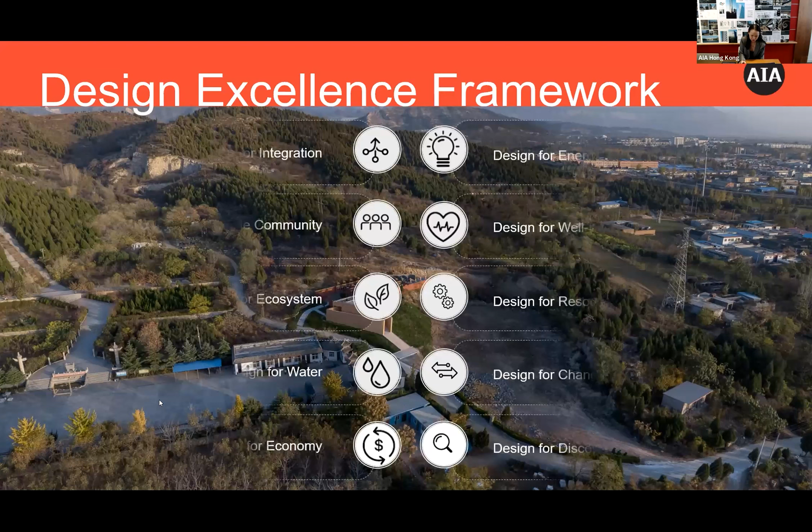And then there's the AIA 2030 commitment. Over 100 architectural and engineering firms of all sizes pledged to address carbon emissions of buildings within this decade. We hold ourselves accountable by reporting the energy and carbon impacts of the projects that we design and build.

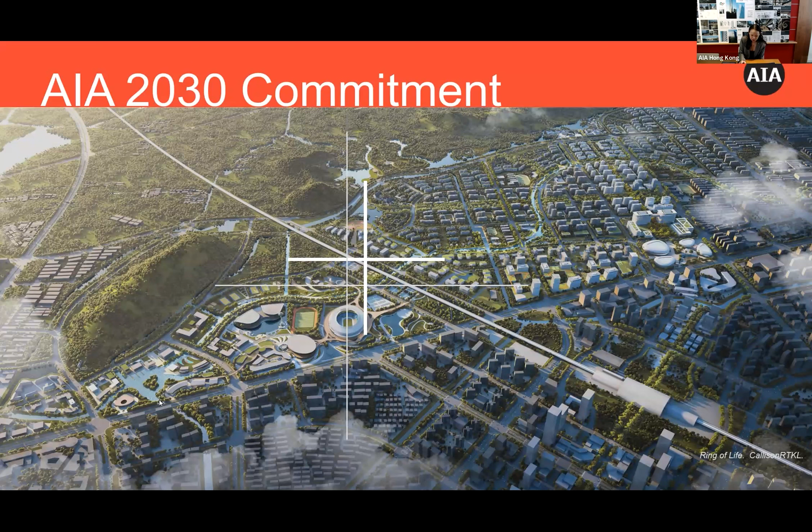By collecting this data, we know where we stand in terms of addressing the carbon emission of our buildings. Over the last 15 years, we as an industry have found ways to reduce operational carbon from building energy use. It is by nature of what we do as architects. So that's operational carbon, but embodied carbon, not so much.

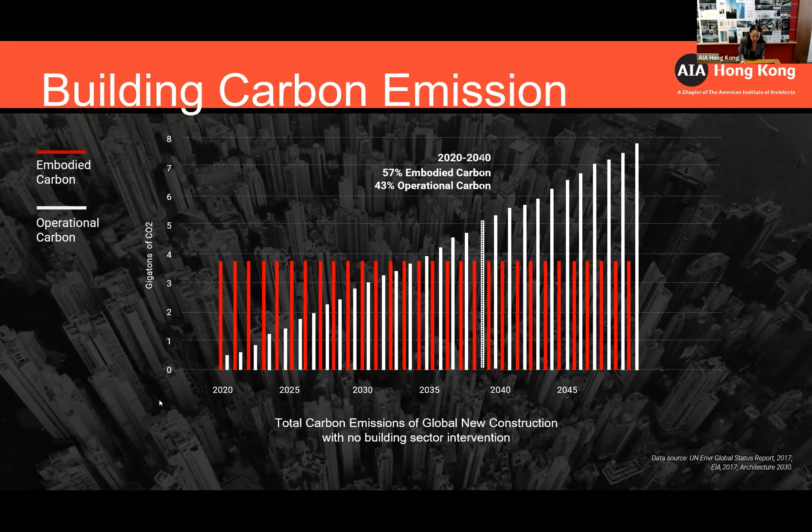Actually, from the firms that we have surveyed, only 5% of the firms have been checking their embodied carbon so far. So we still have a long way to go to address the embodied carbon in our materials. Embodied carbon of material is quite complex because it entails the entire supply chain, and it also goes beyond what we do day to day as an architect.

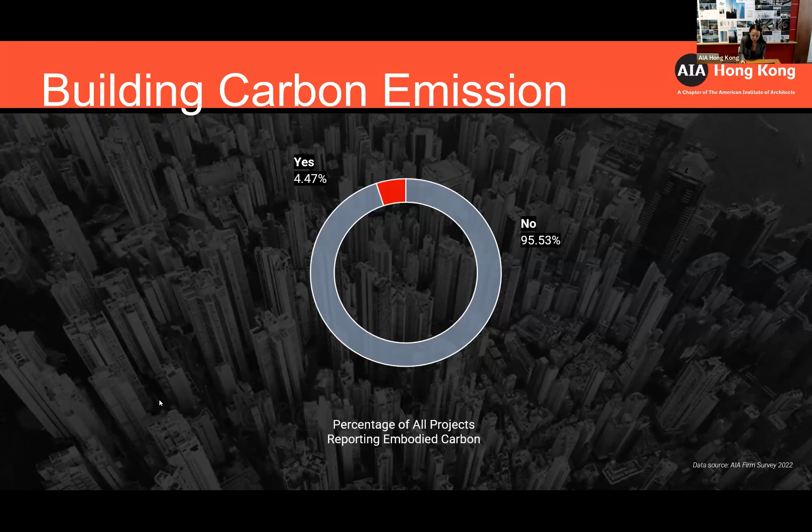But that does not mean we don't have an impact, and that is why at AIA Hong Kong we have been hosting events about embodied carbon of materials. Just last week, we had an event with Color Living, looking at sustainable materials and also looking at hospitality as a sector, and how it addresses the carbon impact in the built environment.

Embodied carbon won't be addressed until we address the supply chain. Last month, we had a visit to the Greater Bay Area, to the Far East Facade Factory, looking at how the organization addresses embodied carbon through the manufacturing stage all the way to installation at the building site. This takes advantage of the Greater Bay Area's unique strength in manufacturing and fabrication of building materials.

We also host a series of green happy hours, like last month as well. We had an event at Quadra where we looked at how the company addresses the entire supply chain, from raw material extraction, manufacturing, to end of life, cradle to cradle, the whole life cycle of the acoustic panels.

As architects and designers, we work project to project. And at AIA, we believe this is our ultimate project. Which brings us to today: we are rediscovering bamboo as a low carbon material. But this is happening in an overarching context of why embodied carbon material is very important.

Hello, everyone. Good afternoon. Thank you, Yimei and Vicky, for the introduction. Thanks for having me at this webinar. The topic of my talk is material diet: strategies to reduce embodied carbon.

So what is material diet? Material diet is about how we could choose the material wisely in order to reduce embodied carbon. It's a bit like the diet we use when we're trying to keep fit. It also talks about a material pyramid, where conventionally we use more high carbon construction material, and now we're starting to use more low carbon material. But there's also choices of climate negative material that we could use.

So if we swap the proportion of material we use to choose more bio-based material, including timber or bamboo-based material, then we could compensate for the higher embodied carbon emission from those conventional construction materials, in order to achieve a climate neutral construction. And that is what the researcher called material diet.

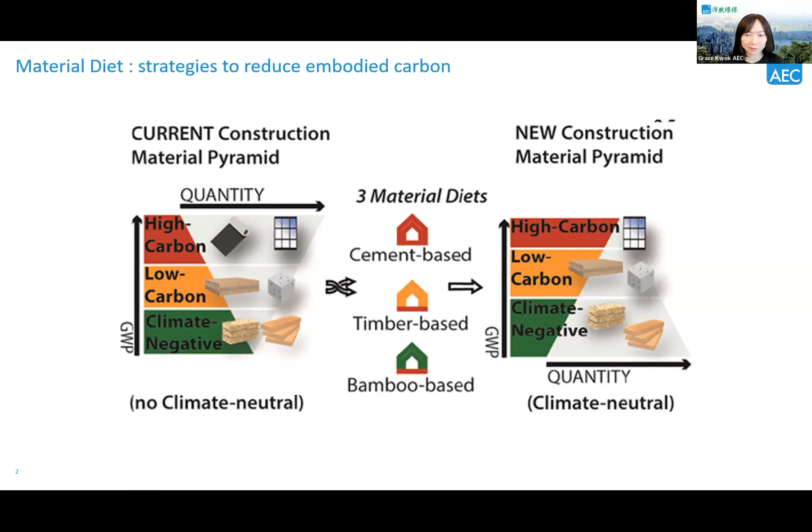So for whole life carbon assessment, I think in one of Vicky's slides she also showed us that in a few years' time, maybe right after 2030, the amount of embodied carbon in the whole life cycle impact of a building will be more than that of operational carbon. That is because operational carbon is going to be largely reduced because of the use of new energy, more renewable energy, and decarbonization of electricity consumption. So in a lot of countries, they're looking at zero carbon electricity generation after 2030. So it is important for us to focus on ways to reduce the embodied carbon.

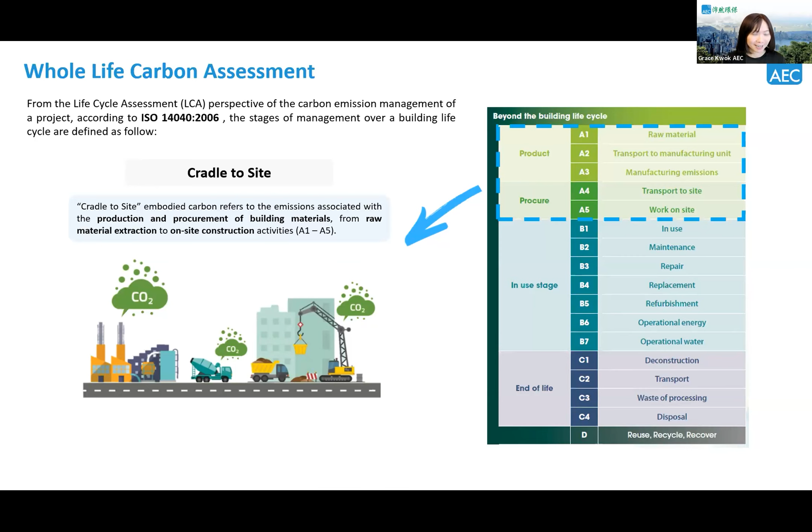So what is whole life carbon assessment? From a life cycle assessment perspective, it is about managing the carbon emission from different stages over a building's life cycle. In the table on the right-hand side, you could see in the building's life cycle, we look at product, procure, in-use stage, and end of life. During the construction stage it's more about the product and procurement stage, so the carbon emission from raw material to transport to manufacturing unit and manufacturing emission. In fact we call it cradle to gate. If we include transport to site and work on site, that will be cradle to site, so from A1 to A5 on this LCA assessment.

From A1 we're looking at all kinds of material used in a construction project, including rebar, concrete, metal, wood, etc. A2 is about transport to manufacturing units, so it's the carbon emission from the transport of raw materials to the production plant. Then the manufacturing process carbon emission is covered in A3.

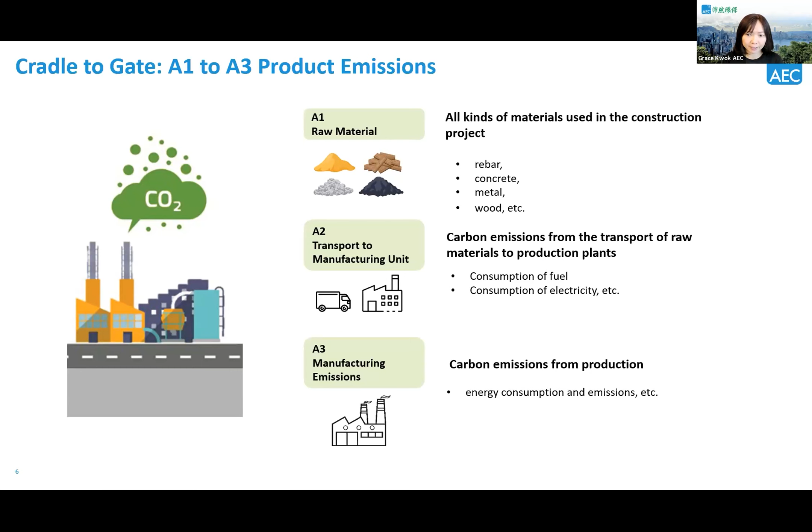After the construction materials have been manufactured, we need to transport them to site, and the carbon emission from that part is covered in A4. So to reduce embodied carbon emission, we encourage the use of materials produced regionally, and locally is even more preferred, to reduce the environmental impact arising from transportation. So how do we define regional material? It's a material that is extracted, harvested, recovered, as well as manufactured within 800 kilometers from the project site.

So A5 is about work on site. It covers fuel consumption, fresh water consumption, purchased electricity, and also waste disposal of the waste that could be generated on site.

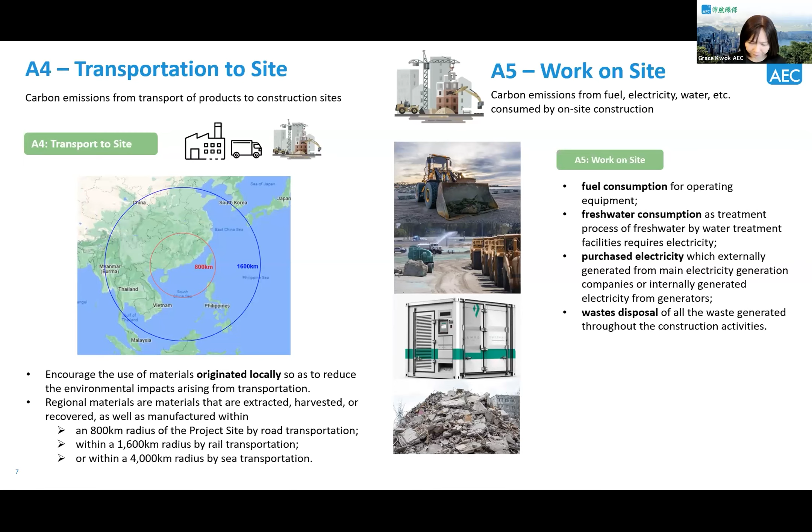So what about greenhouse gas emission accounting for the real estate sector that's used in finance sectors and also in ESG reporting? For GHG accounting method, we are using scope 1, 2, or 3 greenhouse gas accounting methods. Scope 1 is the direct emission of carbon, which includes the fuel you're going to use in your facilities or your vehicles.

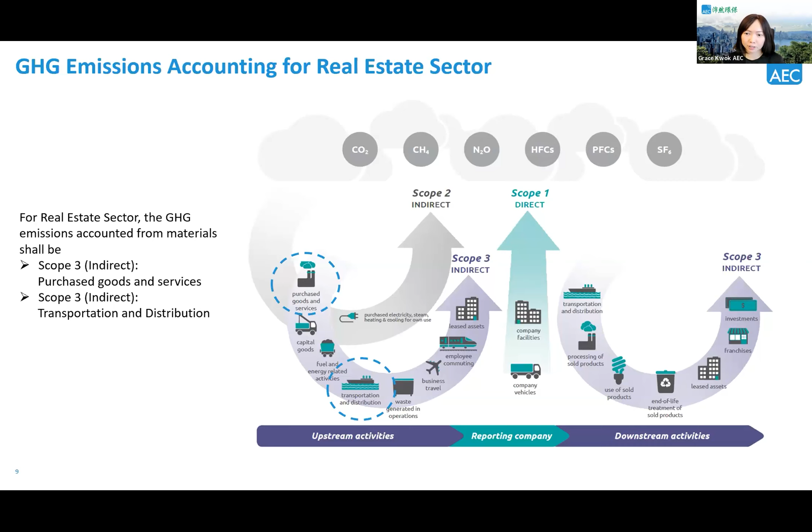Scope 2 is the indirect GHG emission, mainly purchased electricity, while scope 3 would include the indirect emission from upstream and downstream that covers purchased goods, capital goods, transportation, business travel, and the end-of-life treatment of sold product. So if we're looking at construction material and construction activity, that would be the upstream scope 3 emission from purchased goods and services from the contractor, and also the upstream transportation and distribution to the construction site.

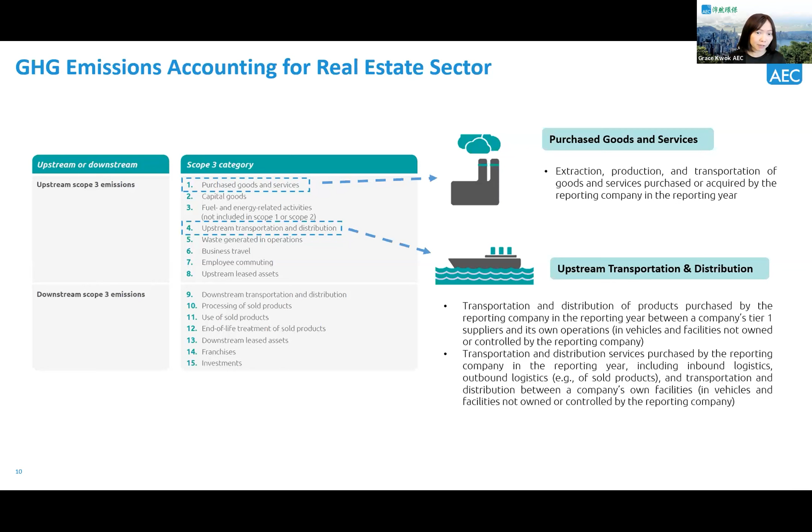In fact, if we include the waste disposal and the construction activity from demolition at the end of life of the building, that would also cover the end of life treatment of sold products from scope 3 downstream.

So what about the latest trend in the green building industry and ESG landscape related to embodied carbon? I think the most important one is the establishment of a global baseline and different reduction pathways for embodied carbon emissions. So RIBA has set a baseline according to this table for different types of building, and also a midterm target of 30% reduction in embodied carbon by 2025 and 40% reduction by 2030. It covers school, office, and domestic.

And also LETI in London, they have set out a target for 40% reduction of embodied carbon by 2020, and 65% reduction by 2030, with some baseline that they've set from data collected in the UK and some European countries.

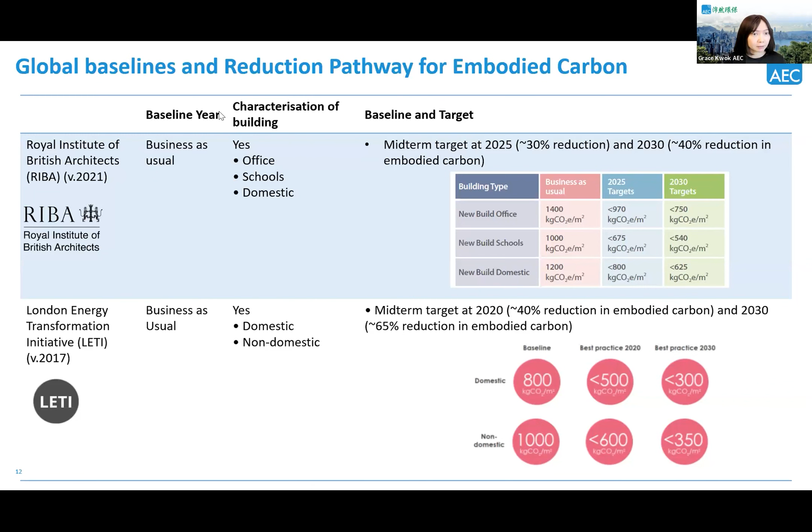Another global baseline recently published is by the Science Based Targets Initiative. Now, a lot of companies have set out their own ambitions and decarbonization targets, and some of them have used the Science-Based Target Initiative to set out targets aligned with the Paris Agreement.

So this is a new set of guidance for the building sector published by the Science-Based Target Initiative in mid-May, which is now under consultation. If you're interested, please check out this guidance and tools on SBTi's website, and you could provide your feedback during this consultation period. I think it will end mid-July.

Yeah, 16th of July. So one of the key proposals in the Science-Based Target Initiative building sector guidance is about the embodied emission pathway. They also have another proposal for the operational carbon reduction pathway, according to the CRREM pathway. You can check that out as well.

So back to embodied carbon emission pathway, which is the topic of today. They have set out some global baselines as shown in the table on the right-hand side for different types of building: residential, office, retail, and other types. But you could see the target is considered quite stringent if we are using some of the embodied carbon baselines in Asian countries.

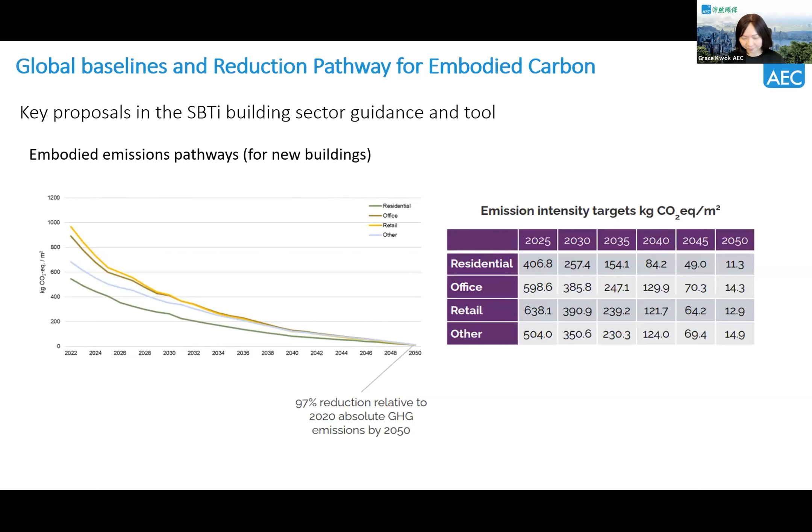This is because for this global pathway and target, they have used data collected probably more from European countries. So in the embodied emission pathway for new buildings, the reduction target is in fact quite ambitious: 97% reduction relative to a 2020 absolute greenhouse gas emission by 2050 for embodied emissions.

So what about Hong Kong? In fact, the Hong Kong Green Building Council has just published a climate change framework for the built environment earlier this month. Within this framework, there's a chapter about operational carbon target setting and embodied carbon target setting, and also a chapter on physical climate risk assessment, and another one about climate resilience and adaptation.

So you're also encouraged to check this out. This publication can be found on the HKGBC website as well.

So for embodied carbon, there's a proposed certification scheme under this climate change framework to encourage industry stakeholders to set targets. First is to reach 40% reduction by 2030, which is also aligned with the World Green Building Council vision. Then the target is to have zero upfront embodied carbon by 2050.

So there are two approaches. The first is a self-determined embodied carbon baseline for a project, where you could use two or three design options to compare with it, and a consistent approach should be used for determining the baseline case and the alternative design case.

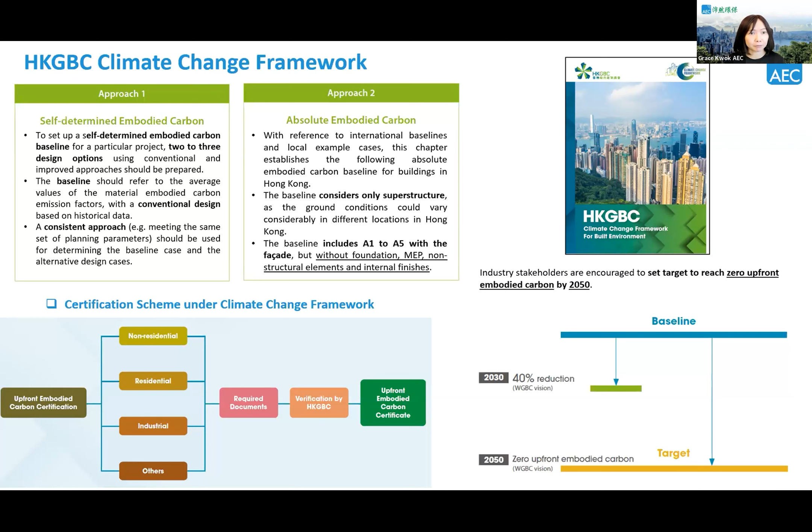So to increase comparability of different building designs, the baseline includes A1 to A5, that is the construction phase upfront embodied carbon, which I introduced earlier. So it does not yet include foundation, MEP, and non-structural elements including internal finishes, but this is a living document. So we're going to see a further version possibly including more elements and components of the building in the embodied carbon emission calculation later on.

And then during the design stage, we should consider build less and build clever, to optimize the build form and structure, to use DFMA, and also design lighter facade, etc. Reduce the MEP ductwork. Design for flexibility and deconstruction is also important, so that we could reuse some of the material and reduce demolition later on during the building life cycle.

Build clever to optimize material usage and design with low carbon materials, recycle materials, and also build efficiently to use low carbon construction technology and eliminate waste. So pre-construction and prefabrication is also a method that we're using more to build efficiently.

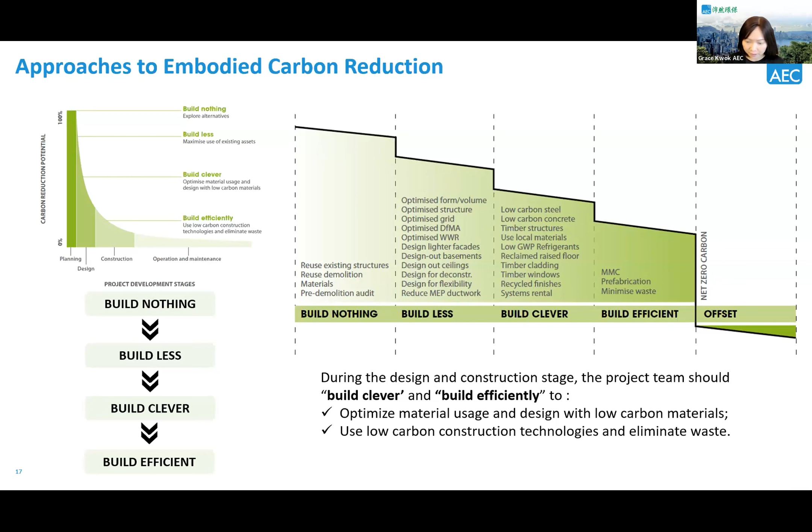So now when we're choosing the material, when we're designing for different build form, the embodied carbon consideration should be taken early, because later on it's difficult to reduce it further. So this should be the first thing you consider when you're designing and choosing the material. The cement and steel, in fact, represent the highest portion of embodied carbon in buildings, especially in Hong Kong.

And the cement sector is also the third largest industry energy consumer, and second largest GHG emitter from the industry. So it represents 5 to 8% of carbon emission globally. I'm going to talk a bit more about green concrete and green cement later on in the case study.

And steel, now we are using more recycled steel because it's highly reusable. So it is recycled under the circular economy model. Steel products such as rebar are produced from electric arc furnace with scrap steel, and in fact can achieve more than 90% recycled content. So the global warming potential value of rebar is much lower than those produced from blast furnace.

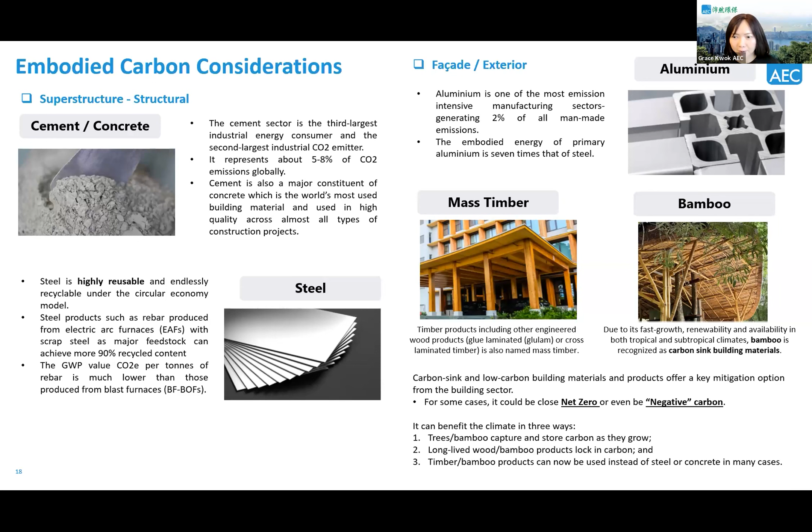So another very important trend is to specify material with requirement on environmental product declaration. Environmental product declaration is actually a standardized document. It will tell you about the product's environmental and human health impact. It is based on an ISO standard, the ISO 14025 standard, and it is a scientific footprint method using the life cycle assessment.

So first, you need to conduct a life cycle assessment before you can have all the data to be included in the EPD. It will tell you about the product's environmental impacts so that you could choose the different product carefully.

And this is an example of an EPD. So you can see in the EPD there will be the system diagram of how the product is produced, and the module that is covered in this EPD. You could see for this particular product, this is a solid wall precast concrete.

It covered the product stage from raw material supply to transport, manufacturing, and also the transport to the construction site, and also end of life usage, including deconstruction, transport to the waste processing and disposal, as well as reuse and recovery potential of this material.

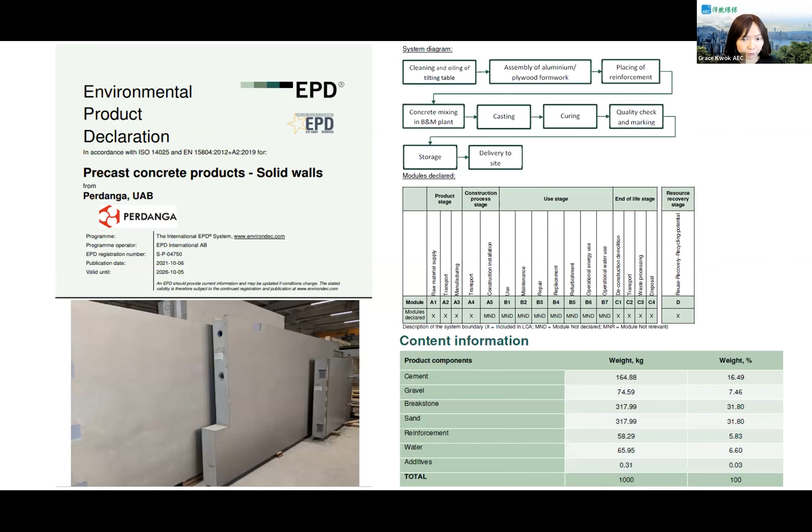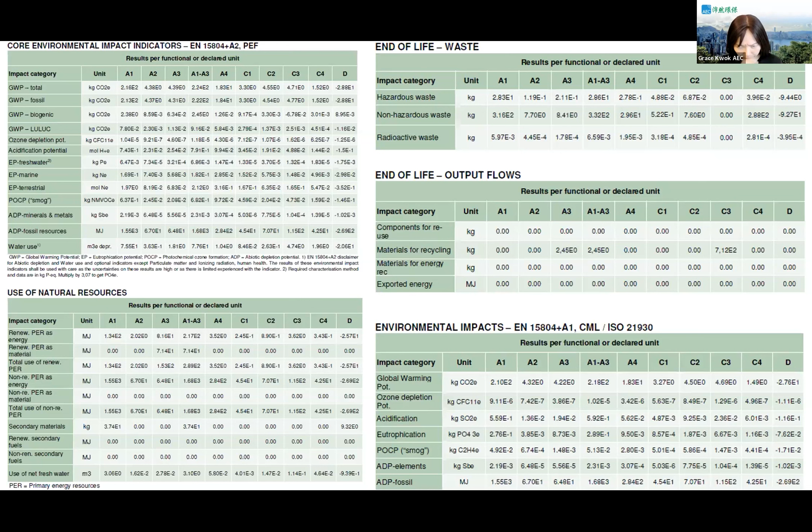You have the content of the material and also different indicators showing the environmental impact of this material. So I would like to highlight, on the right-hand side, the bottom table. Usually in the EPD, we'll use the global warming potential to show the carbon footprint of the material.

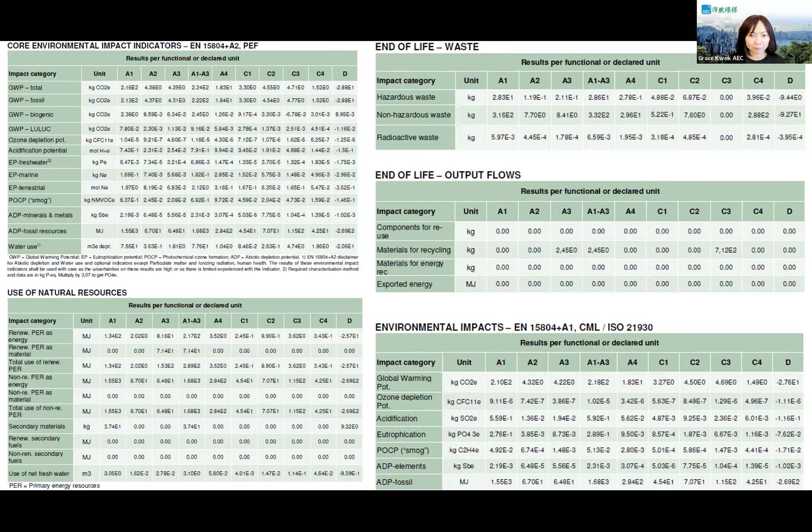And it's also important to note that, for material having an EPD, it doesn't mean that it would be low in embodied carbon emission. You need to check out those values and compare among different products to choose one that can meet your requirement for embodied carbon limit.

And there's also different tools available for you to estimate the building life cycle carbon emission. In Hong Kong, we have the CIC carbon assessment tool, but there's also international embodied carbon assessment tools available.

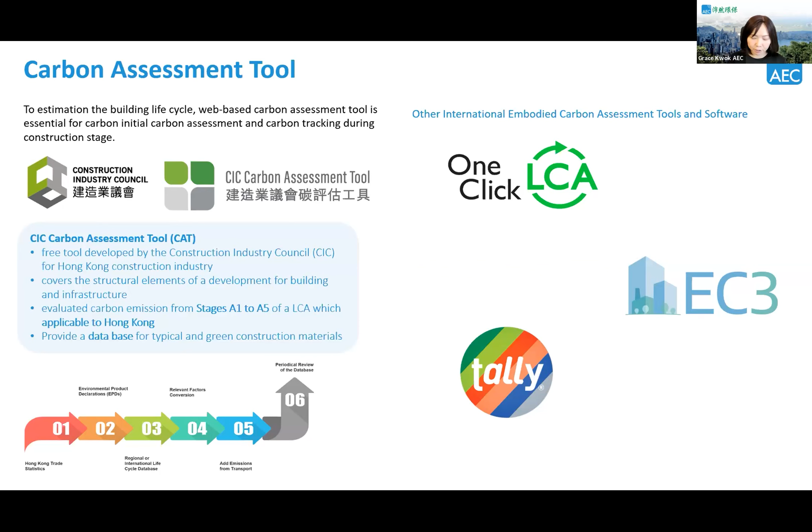It is important to note which modules the tools cover, whether they include all the stages or just some. For example, the CIC carbon assessment tool includes stages A1 to A5, but it may not cover some fit-out material. Other tools may cover more materials related to interior design and fit-out.

Another important move is to conduct construction stage carbon management as part of the life cycle assessment. Before, when we focused more on operational carbon, we would conduct building energy simulation to find the operational carbon emission of a building under different design scenarios. But now we also need to find out the embodied carbon emission from different building designs and choice of materials.

So we would conduct preliminary embodied carbon assessment based on the preliminary design, and develop a carbon management plan, such as setting different KPIs for target embodied carbon, and developing construction materials specification with recommended emission factors for building materials. Embodied carbon tracking during construction is also important, to review the emission factors of the construction materials used, keep track of emissions, and propose actions or measures if necessary.

And the final embodied carbon assessment verifies the embodied carbon at the end of the construction stage, reviewing the actual embodied carbon emission against the target. This is important for us to learn from each project, gather the data, and have better construction stage carbon management in the next one.

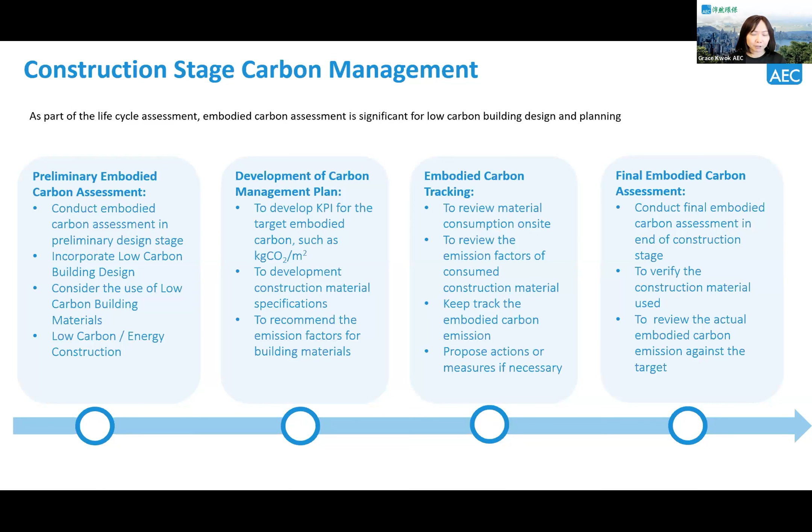So this is a case study on construction stage carbon management. This project is still ongoing, in Hong Kong. It is a redevelopment project of a Grade A office on the Hong Kong Island side. We have proposed low carbon features like low carbon EAF, green rebar steel, green concrete and cement mixed with cement substitute, biodiesel use on site, construction site electrification, and comprehensive site practices for waste management.

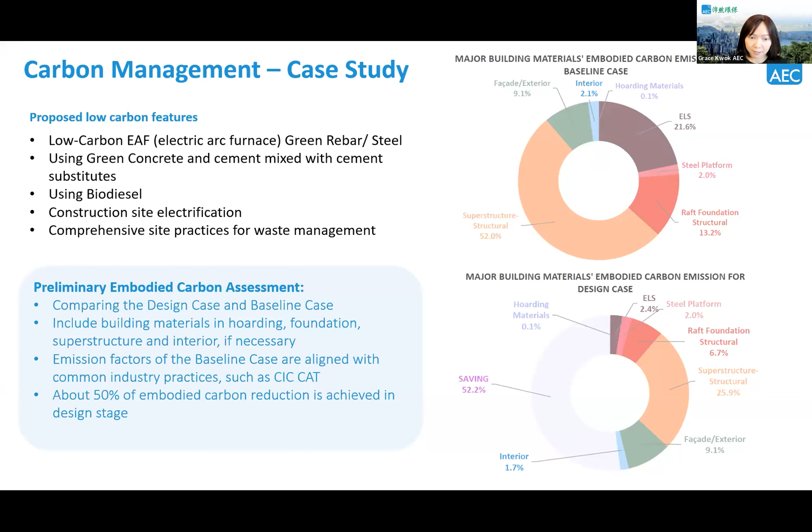For green rebar and steel, this is now the largest driver in achieving low carbon emission, using high recycled content and switching to electric arc furnace. Compared to typical rebar, the carbon footprint can be reduced by 40 to 50%. In this case, we are also using regionally manufactured green rebar.

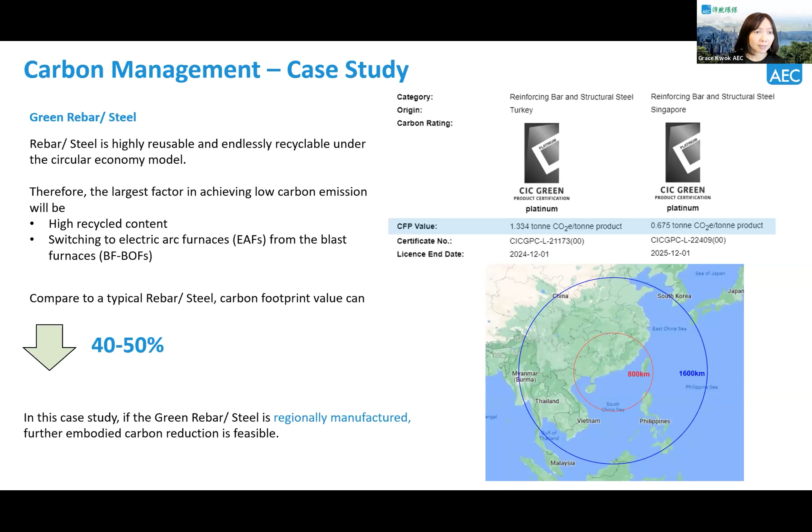For green concrete, we're using PFA up to 25 to 35% cement replacement, and GGBS and silica fume, in order to reduce embodied carbon from the concrete. The low carbon cement is regionally sourced, from a cement manufacturer with a clear net zero strategy and roadmap.

Other low carbon construction practices include using biodiesel, early planning and contact with the utility company so we could use electricity on site as soon as possible when construction starts, good waste sorting and recycling practice to increase waste recycling, and carbon tracking and reporting to review the actual embodied carbon emission.

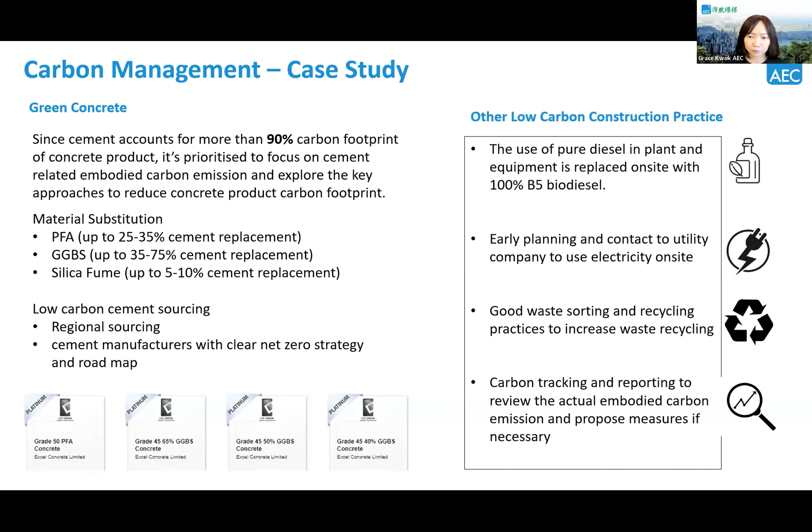Lastly, a bit about AEC Group. Our company is Hong Kong-based, a pioneering sustainability and environmental consulting firm with more than 29 years of experience. We have 5 segments: green and healthy building, environmental consultancy and sustainable design, acoustic, audiovisual, lighting and theater design, and green finance, sustainability and ESG advisory, as well as smart and green IoT.

We are now working with clients on both project and organization level to achieve carbon neutrality and enhance climate resilience. If you're interested, you could check out our website. There's also a film about green building that we made before together with BBC and World Green Building Council. Thank you very much.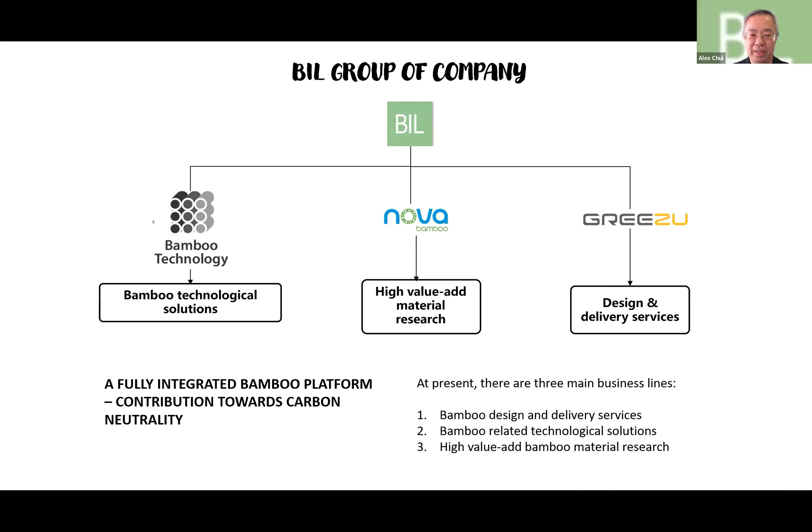A brief introduction about us, Bamboo International Limited, BIL. We have different business lines in addition to the more traditional design and delivery services of building material. We also have other business lines through joint ventures with different entities, because we believe that to promote bamboo, we really need to spend resources and time on research to dig out all the hidden benefits of bamboo as a material. We also try to integrate bamboo with other green technology to form more integrated green solutions to offer to the market. So that's where we are.

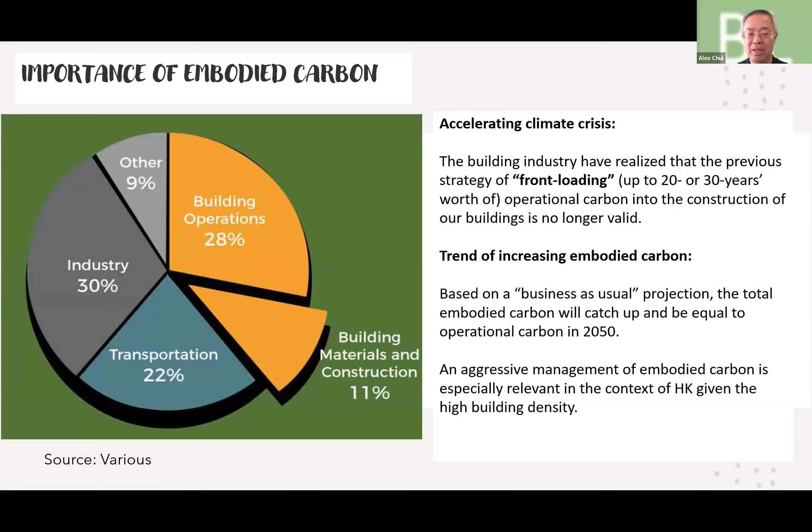In Europe, the European Parliament has passed two key initiatives at the beginning of this year. It sets out clear initiatives and clear targets for member states to follow. They try to set out more definitive targets to be achieved in terms of embodied carbon, and they also want to unify the methodology to be applied in the EU. I think that would go a long way to encourage the building sector to put more emphasis on tackling embodied carbon.

We also believe that would drive industry to have more innovation to explore new low carbon materials, not just bamboo, but other low carbon materials to be used in the market.

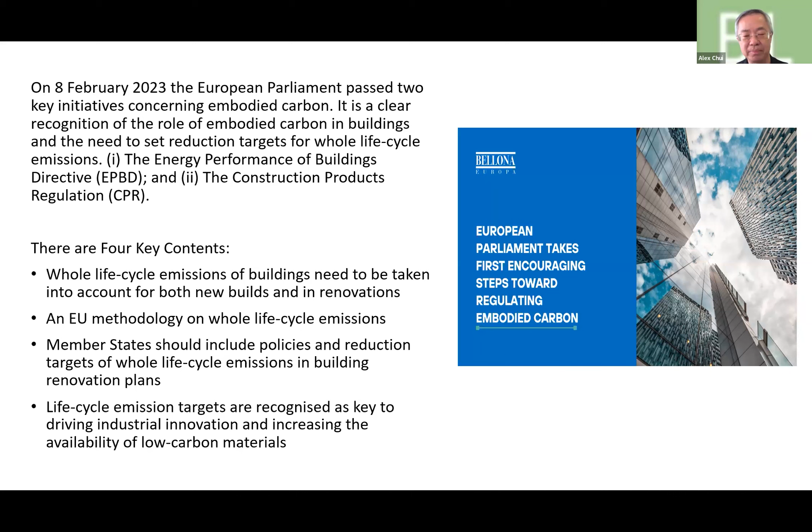China actually is moving faster. Back in 2022, they passed two policies to encourage the procurement and application of low embodied carbon building materials in the country. In the same year, and I think the year before, in consideration of low embodied carbon building material, China has earmarked bamboo as one of the key building materials they want to pursue.

I think the reasons are, one, China has rich resources in bamboo, and second, as I mentioned earlier, bamboo industry is a very important poverty relief initiative for the Chinese government to take care of farmers in the country. So they are really moving ahead in promoting bamboo in the market, and hopefully Hong Kong can follow quickly along this line of direction.

Now, the benefits of bamboo. I think we all know that bamboo as a natural material is a renewable resource, and is beneficial to the environment, including soil health, and of course the carbon sink property. I'm not going to go into detail of all the small numbers, but I think we are all aware of this environmental benefit in natural bamboo.

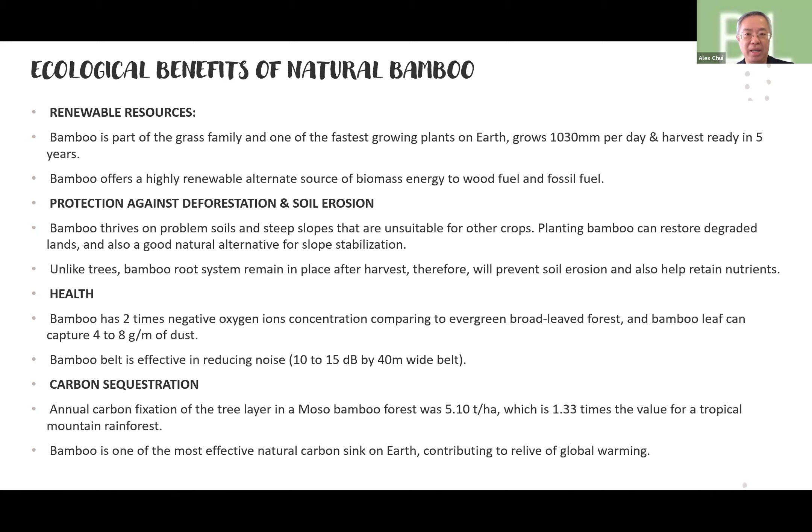I would now turn to engineering bamboo, which is normally what we use in the building sector. Generally, there are two types of engineering bamboo. One is what we call solid bamboo, basically a laminated product hot pressed using glue. The other is what we call strand woven bamboo, formed by high pressure pressing of bamboo strips in a more fibrous form.

They have different pros and cons and different applications. Solid bamboo is generally more versatile and flexible, and can be turned into various profiles for a big range of design aspirations, which I will show later in the slides.

Strand woven bamboo is a later technology. The key reason for strand woven bamboo is it is much more hard and robust, and more suitable for environments with heavy traffic, especially flooring in outdoor and high traffic environments, say in a train station. Looking at the table below, you can see a high level comparison between the physical properties of engineering bamboo and timber. You can notice that engineering bamboo in terms of physical properties is at least matching, if not better, than timber that we normally use in the building industry.

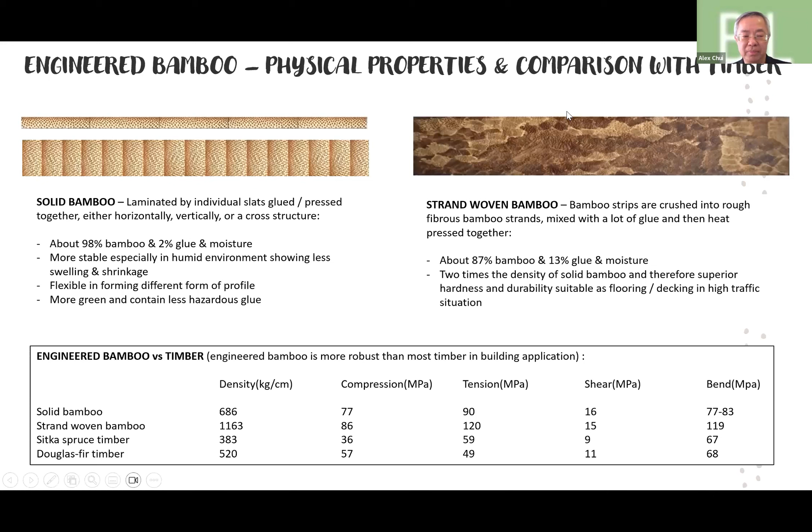These slides are following some examples about the application of engineering bamboo by our company. In Hong Kong, it's mostly used as a finishing material.

The top left-hand side is the Shaw Auditorium in HKUST. Below is the M+ Museum. In the middle is the Kowloon East Regional Police Headquarters. And on the right-hand side is the Hang Seng University in Sha Tin.

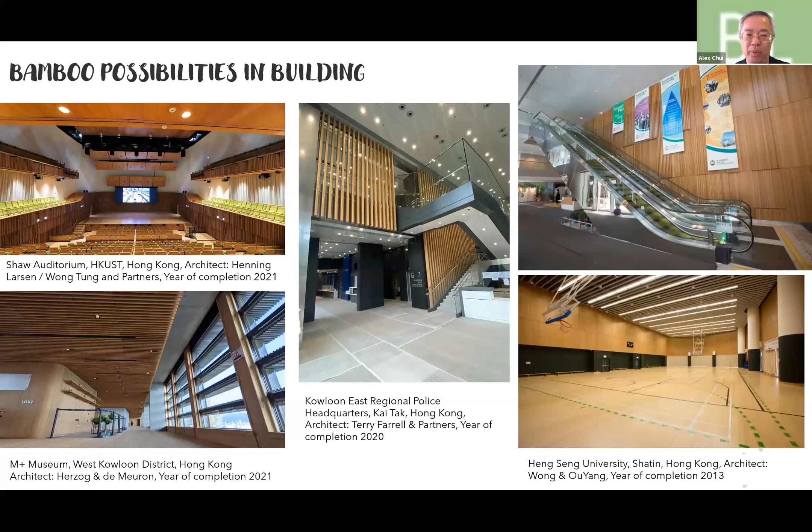The next slide is about some structural bamboo projects that we undertook in China. It is true that internationally, including China, there isn't any regulatory framework on structural bamboo. Only recently has ISO passed new regulations.

ISO has released new regulation to look at structural bamboo. But the Chinese government is more open to embrace a more engineering approach to use structural bamboo in different settings.

Here are the projects that we have been doing in China. We're seeing a lot of mass timber structural buildings in the US and Europe, and based on our experience, structural bamboo can actually achieve very similar results.

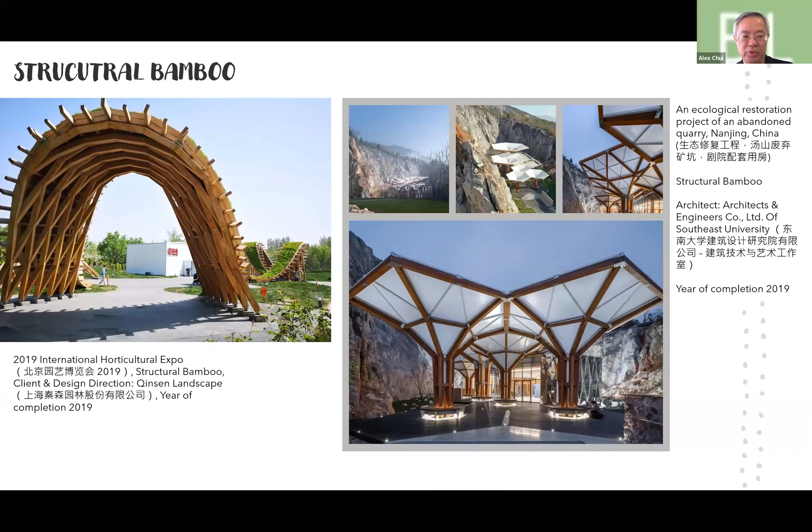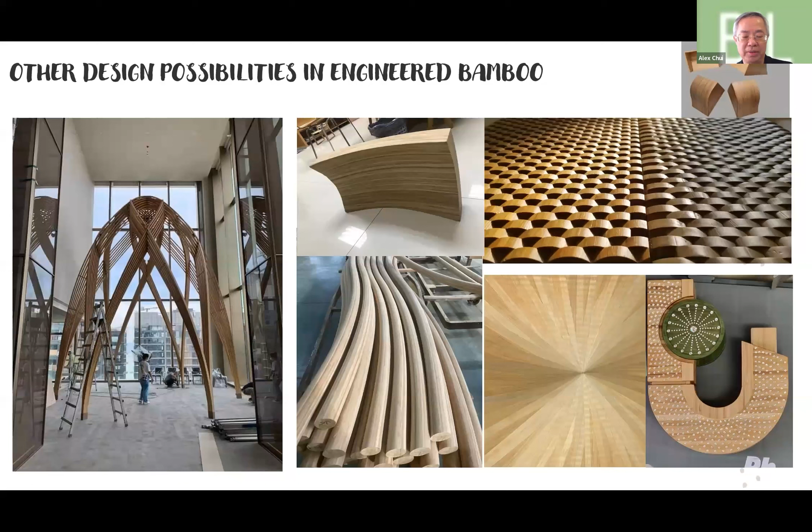Bamboo furniture is actually becoming very popular in the US and Europe, not so much in Hong Kong, but overseas it's becoming a very promising market.

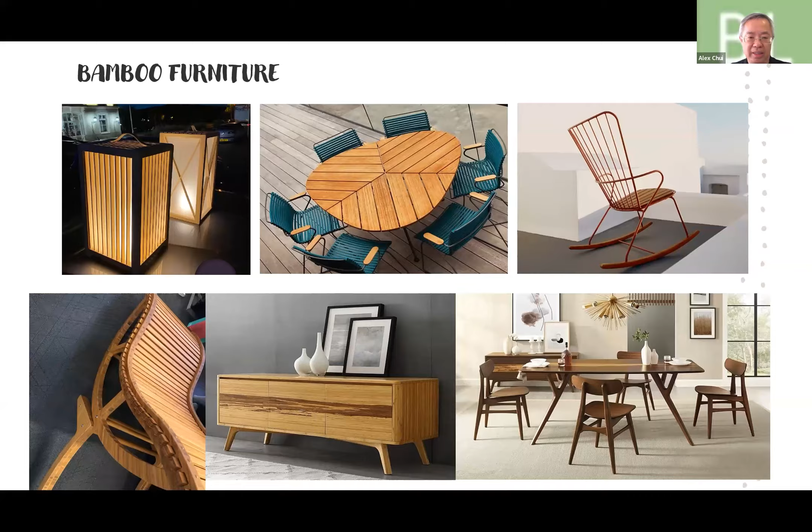Durability is a question that most people will ask about engineering bamboo. This is a project that we did about 10 years ago in Shanghai - it's a restaurant where the building facade is made of bamboo panels.

Now it's 10 years on. I took these pictures earlier this year. There hasn't been any really aggressive maintenance or replacement in the 10 years.

You can see that the bamboo panels are still in a very decent condition, which sheds some light on the question about the durability of engineering bamboo in external environments.

Shanghai is actually quite wet and humid, similar to Hong Kong, so that should give us more confidence when we consider bamboo as a facade material.

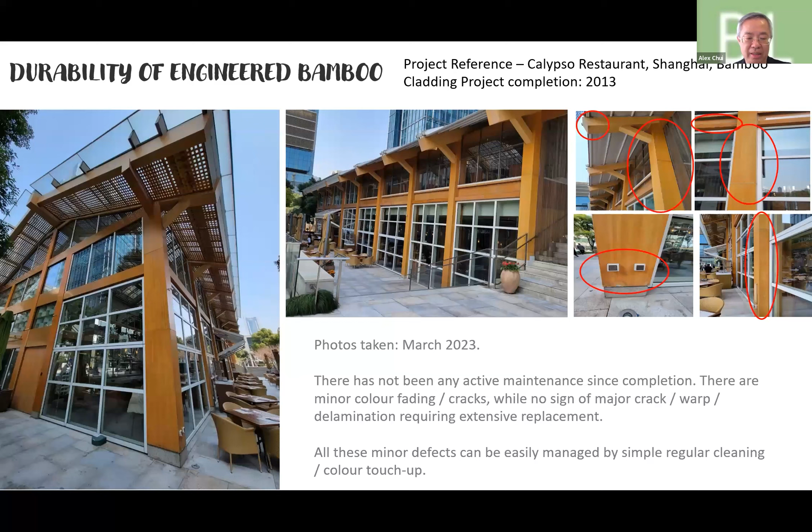This is in Hong Kong, the Hang Seng University - the deck was also completed 10 years ago. Because the deck is more frequently used, more regular maintenance is required.

But I think the key issue here is, yes, there is color fading as a result of radiation, but we are not seeing any substantial structural defects or damage in the past 10 years.

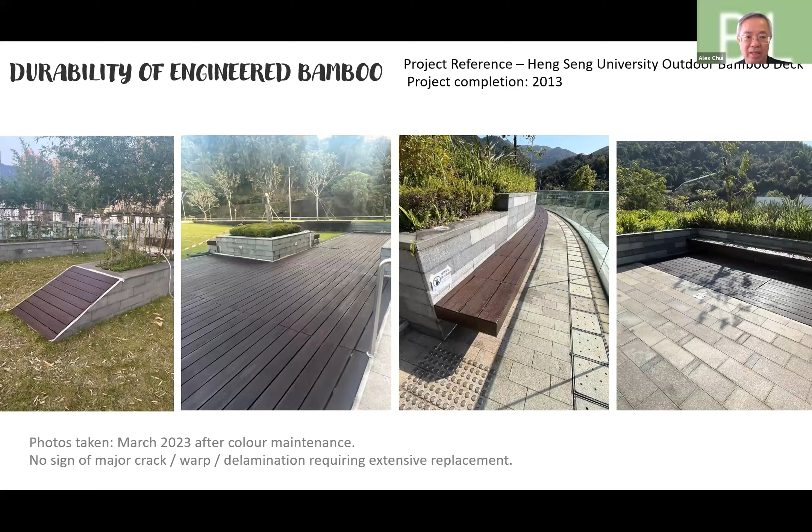This is a research paper by one of the researchers in Europe. They're talking about a material diet - Grace has covered that, but this is a paper I think is worth reading.

It sets out a very comprehensive analysis on the life cycle assessment of different materials - cement-based, timber-based, and bamboo-based - looking at the potential benefits of the different materials in the pursuit of carbon neutral buildings.

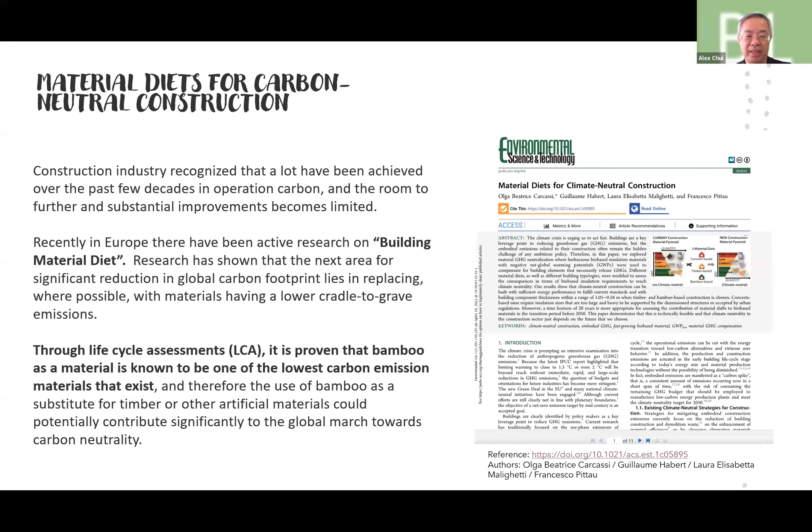This is a study that we commissioned a professor at the City University to help prepare for us. We are using the actual manufacturing process of our own factory to carry out a life cycle assessment.

We compare that to other more commonly used building materials available in the market. When we look at the left-hand side, the green, orange, and red figures are based on different end-of-life treatments of the bamboo.

In Hong Kong, we really don't have any real end-of-life treatment of any bio-based material - basically it ends up in the landfill.

But even given that, you can see that the embodied carbon of bamboo - this is based on cradle to gate, the factory gate, not including transportation from the factory to the final site destination.

You can see that the embodied carbon is basically very close to neutral. And if you take into account active end-of-life treatment of the bio-based materials, say we use it as a bio-based fuel in place of fossil fuel for energy generation.

The combined embodied carbon actually becomes negative because of the carbon saving, the carbon credit gained from consuming the bamboo at the end of life as bio-based fuel material.

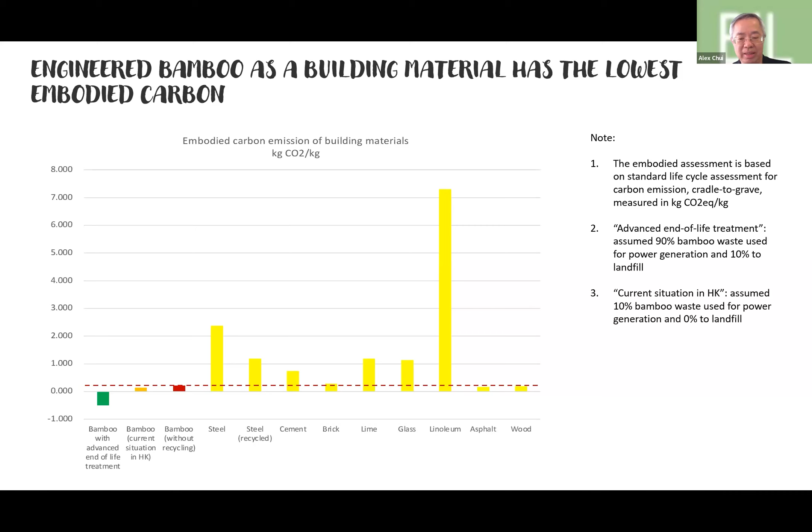So it is a very encouraging sign, and we tried to capture the numbers in a more quantitative manner. Now, looking into the future, what can we do more to promote bamboo, in our opinion?

Despite bamboo being used quite extensively in the US and Europe, and its robust physical properties as engineered bamboo being well tested and documented, it is still not one of the mainstream materials that stakeholders in Hong Kong want to consider, including the government, private developers, and facility managers. Architect friends have been helping to promote bamboo in many occasions, but at the end, the final developer and facility manager are actually quite conservative, and we are seeing a lot of roadblocks along this direction. But hopefully that will change.

The mindset will change going forward. One of the things that we believe could actually help promote bamboo is the regulatory framework. There isn't any regulatory framework, there isn't any requirement on the assessment of embodied carbon in Hong Kong, and that is one of the key barriers in the onward promotion of bamboo in Hong Kong.

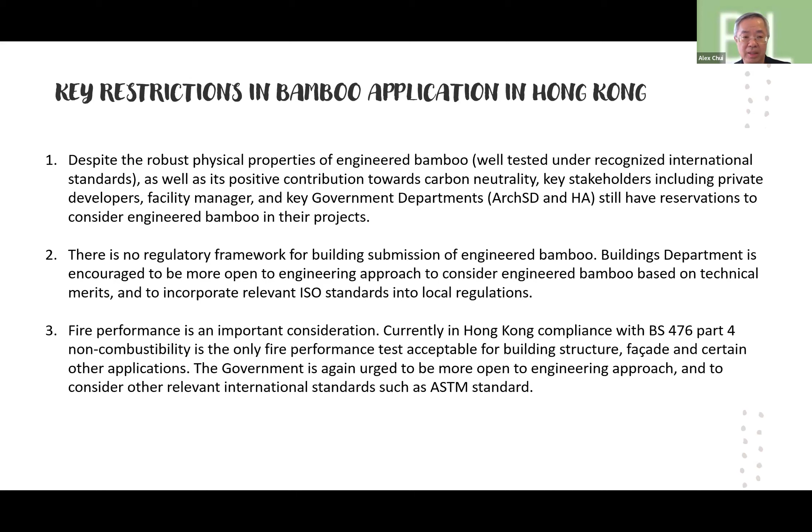Hopefully the situation will change. There are a few things I would suggest going forward in the promotion of low embodied carbon material. As mentioned earlier by Grace, the Hong Kong Green Building Council is passing a new framework on embodied carbon, and hopefully the government will also respond to include embodied carbon in the Hong Kong Climate Action Plan 2050. It's quite disappointing that this is not even mentioned in the Hong Kong Climate Action Plan 2050. Hopefully the government will revisit this and borrow the experience from Europe and from China to really gather the resources in Hong Kong to tackle this issue.

This is the same report I mentioned earlier that we commissioned a City University professor to carry out for us. We were trying to quantify the potential benefit if engineered bamboo is used more extensively in Hong Kong. This is a very interesting scenario: we try to replace the wood stock in Hong Kong with engineered bamboo and look at the carbon saving as a result. You can see two numbers here.

One is the business as usual case, meaning there isn't really end of life treatment of the bamboo, but you can still see a very significant improvement in embodied carbon. If Hong Kong also has end of life treatment as in other parts of the world, the embodied carbon mitigation benefit can actually be very substantial, up to almost 25% of the total carbon emission in Hong Kong in the year 2020.

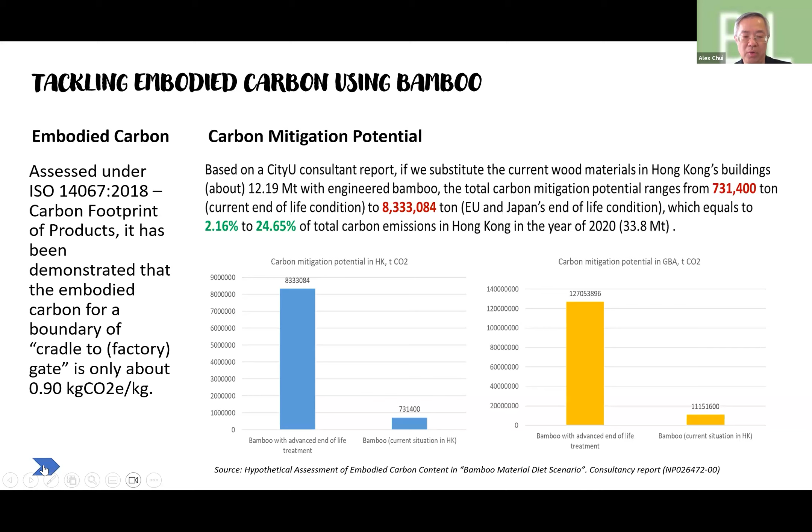I believe this is a very good tangible presentation of the real benefit of low embodied carbon material, including bamboo. The other point, as I mentioned earlier, is that we would like more government support in research and development in bio-based low embodied carbon material. We have been working with City University on material research, and this is our first research product.

We call it Super Bamboo, and it received a Gold Award at a Geneva conference on innovation. We have US and Hong Kong patents already. This Super Bamboo actually has two benefits in this material.

We structure the bamboo material in a way that we do not need glue to form the final product. As I mentioned earlier, from raw bamboo to engineered bamboo, glue has to be used to make sure the structure is there to form what we need for the eventual end building products. But in this particular invention, we discovered a way to rearrange the bamboo material so that we do not need glue to form the final product. So that is, if you like, the greenest building material that we can look for.

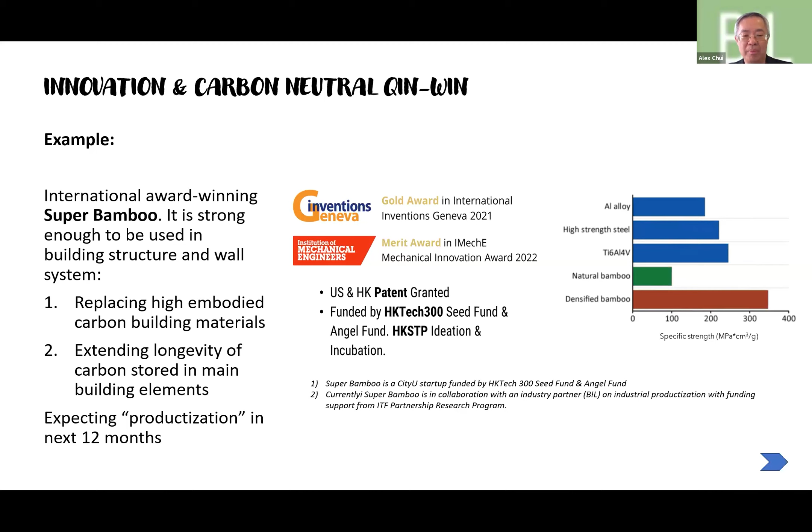That's why I always want to emphasize that it's a scenario of innovation and carbon neutrality being win-win. There's always room to take out more value in bamboo and other bio-based materials to make them a more ready alternative to all the conventional building materials.

I'm not sure you're all aware, bamboo is basically part of the grass family. That means first, there's no regulatory barrier against planting bamboo in Hong Kong. Second, it grows very quickly, one of the fastest growing plants. And it has a very robust root system, meaning it can tackle poor soil conditions, and even be used as a soil retaining measure.

When we look at Hong Kong, despite what we always talk about the high density, actually the percentage of built area in Hong Kong is quite low. There's a very extensive area where we can encourage the planting of more natural bamboo. This will definitely help improve air quality in our city, and hopefully restore some of the degraded land in the New Territories.

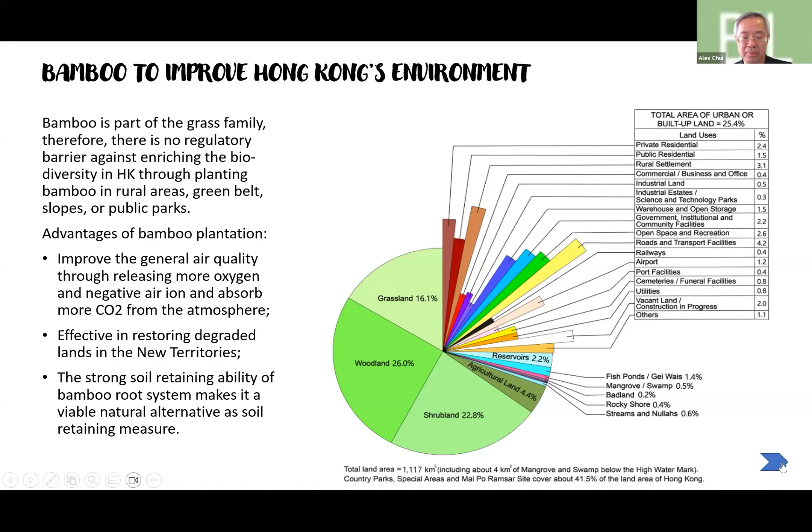As a member of the Federation of Hong Kong Industries, we are asking for a meeting with the Environmental Bureau sometime later this year. One topic on the agenda is to discuss setting up a public-private collaboration task force, to learn from the experience and regulations from other parts of the world, and revisit some of the regulations and rules in Hong Kong to encourage or allow the use of more bio-based material in this city. Hopefully we can get going.

We really want to embrace a more open attitude, looking at this purely from technical merit, to see how we could encourage more bio-based material to be used here, which I'm sure will help reduce embodied carbon in Hong Kong as a whole.

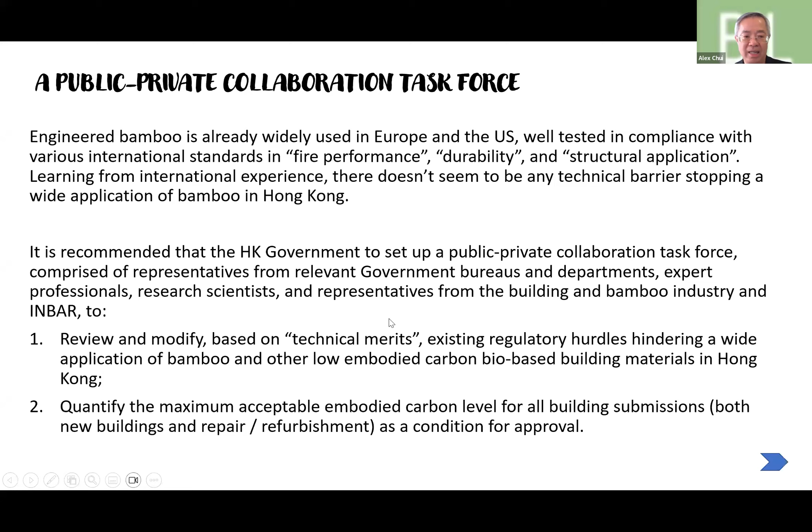Lastly, there's an initiative we and our partners have been looking at in the past 12 months. China has been moving very quickly in encouraging bamboo industries in the country. We're looking at it from another perspective: given Hong Kong's status as an international city and the availability of other resources and talent here, we're trying to establish what we call a demonstration bamboo hub in Hong Kong. This would show China and other parts of the world with rich bamboo resources how we could have a complete bamboo industrial chain established — from planting, to research, to industrial production — producing real high value building products, to upgrade the current bamboo industries in China and other Southeast Asian countries. We believe this will be a very promising initiative to put Hong Kong in a more pivotal role in the regional bamboo and carbon offset market.

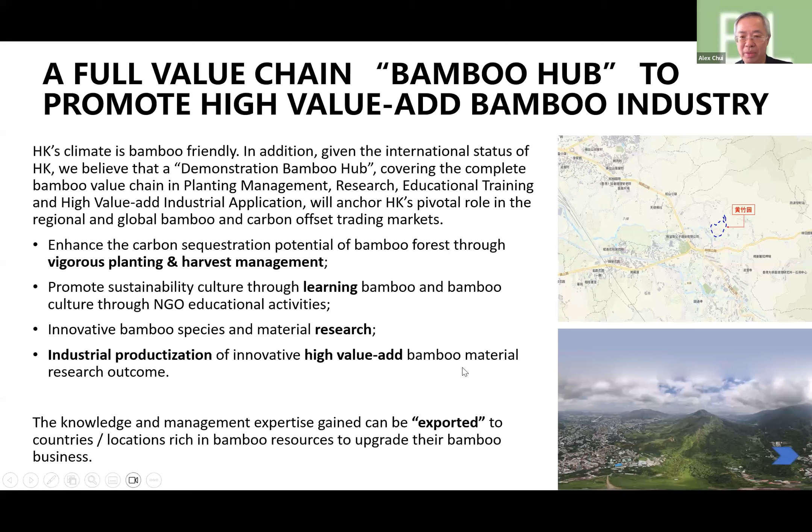So I think that is something we will want to push on, and hopefully we can share more later when we are really making headway into this particular project. It's really exciting. So I think that brings me to the end of my presentation today. Thank you again, Yimei and Vicky, for the opportunity.